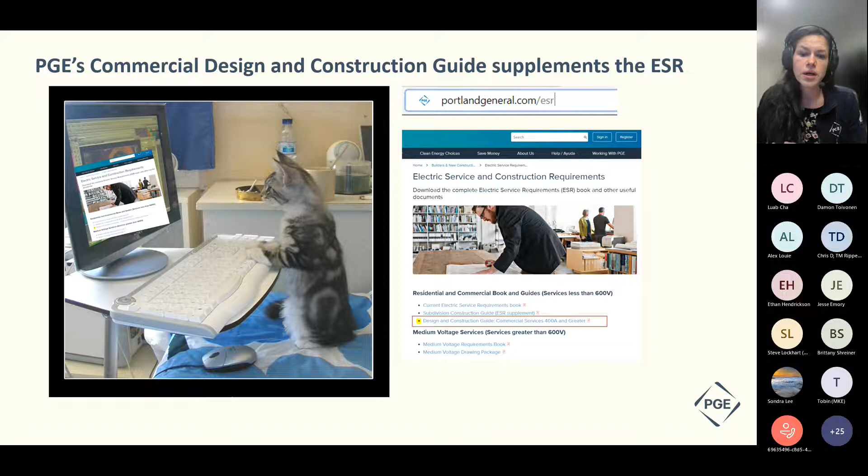All of PGE's public documents are at portlandgeneral.com/ESR. Please take a moment to download a copy of this commercial guide. It's the third item down, so you can follow along with us today. I'll try to point out the page I'm looking at, so if you want to scroll to it, you can do so. Some of you might prefer a physical copy. We do pass out physical copies of the ESR and the subdivision construction guide. We are not yet doing so for the commercial guide, but we do plan to do so in Q2 of 2023.

This is the scope of our commercial guide. It's for customers 400 amps and greater, so this excludes residential shops and barns. But it includes a wide variety of commercial customers, small commercial customers, medium size, large industrial, and everything in between. We're aiming to support new, rewired, relocated, or temporary services, and the designs to support secondary services. So this is not for medium voltage customers.

It doesn't have sufficient information to adequately support certain civil infrastructure projects like bridge crossings or railroad crossings, though it could be helpful for those. You'd still need additional information from PGE. And it doesn't provide adequate information for municipal projects like street widening. The main goal is to provide answers for frequent questions that we get in the field and address certain issues that we've seen. So our focus here is design and construction information from the customer installed equipment to the service.

Key parts of PGE's internal standards are made public. So that's a key piece. We have orally transmitted this information, but we're now trying to proactively provide it earlier in the process to increase awareness. And I think this goes without saying, but this is not a PGE approved job sketch. There will be site conditions that may warrant other items or other requirements that you might discuss with a design project manager and a field construction coordinator. So always go with whatever your approved job sketch is.

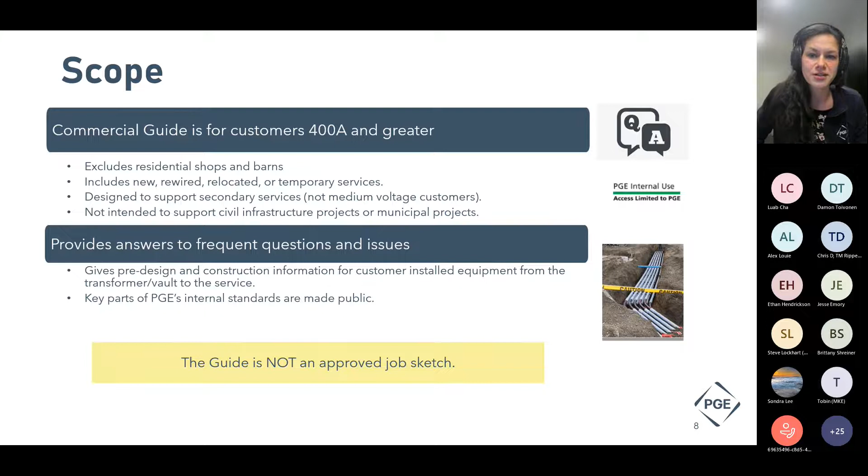The first three sections here are the preliminary information, the pre-design, and the design. And these are largely targeted for architects, engineers, developers, construction contractors, and consultants.

Out of curiosity, could all the architects use that little reaction emoji and raise their hands so we kind of have an idea how many architects we have in the room today? Welcome. Could all of the engineers raise their hands so I have an awareness of how many civil, electrical engineers, and others that we have? Welcome. Oh, today we've got a lot of engineers. This is our second presentation this week, and the earlier one was on Tuesday. They're identical presentations, and you can lower your hands. And all the developers and construction contractors, could they raise their hands here? Quite a few. Welcome to you.

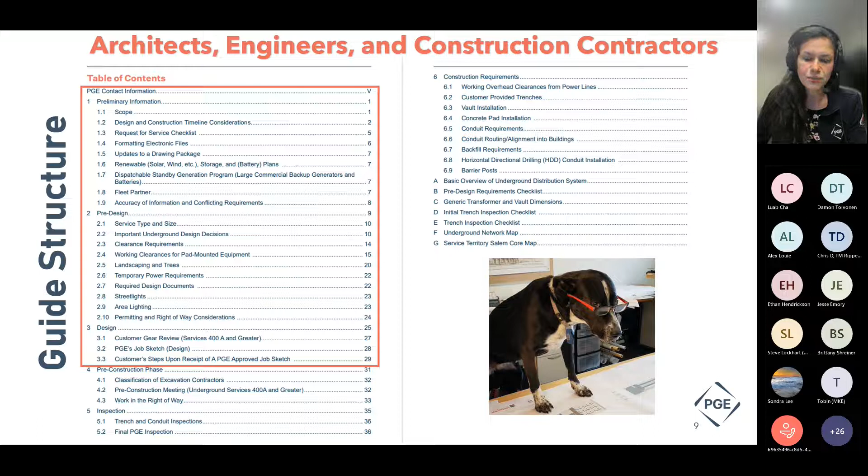So today, you can expect to leave with a better understanding of the steps required from the pre-design stage to the energization of the service. One of the most important steps in that pre-design phase is reviewing clearances. I understand they're not sexy, but PGE does a lot of redesigns that require architects to redesign their landscaping, parking, or even sometimes the main floor of their building. And unfortunately, this isn't uncommon, and it's more common than really anyone would like.

One example that comes to mind is that recently PGE energized this upper left transformer. And later, upon returning, we discovered that the customer installed an ADA ramp right in front of it. So we were unable to open the transformer and no longer had our safe work clearances. The middle top image shows some of the final building clearances. If PGE determines that there isn't room on the customer's property with space for safe working clearances, PGE will require a Class A room within the building, like the one on the top right.

Obviously, adding a room to fit 1 to 3 5 by 9 foot transformers with required working clearances is not an insignificant redesign of the main floor of a building. So our goal here today is to build a partnership with earlier communication with architects, engineers, and developers so we can save time and money and improve our customer experience.

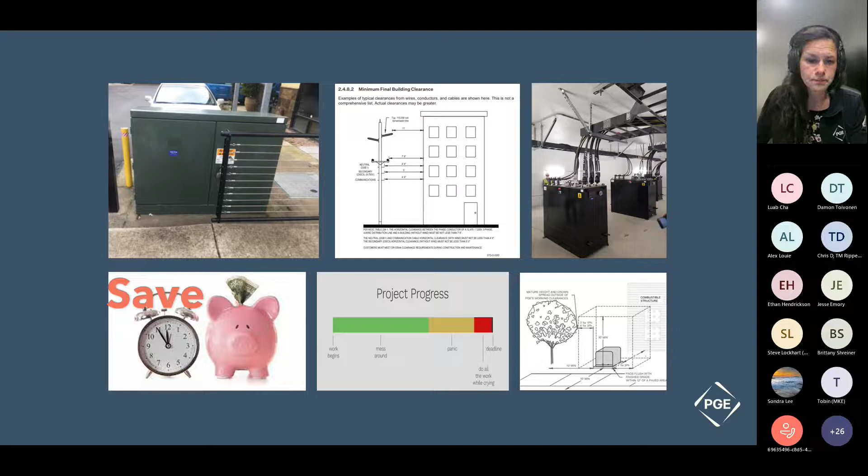For the construction contractors, civil engineers, and excavators on the call, and I know we asked about construction contractors earlier, but could you raise your hand again if you're a construction contractor? Oh, thank you for joining us today. And any civil engineers on the call? I'm here. Thank you for joining. Any, out of curiosity, any excavators? Thank you for joining us here.

In this section, the pre-construction inspection and construction requirements, we have a lot of pictures, drawings, and text showing PGE's installation requirements for pads, vaults, and conduit. For example, in section 6.5.3, we provide text and drawings for conduit installations for pad-mounted transformers. Before, this information was on our job sketch and transmitted orally, but there's only one PGE job sketch, so the information was not always readily accessible to contractors and subcontractors. So this guide can easily be downloaded for a larger audience.

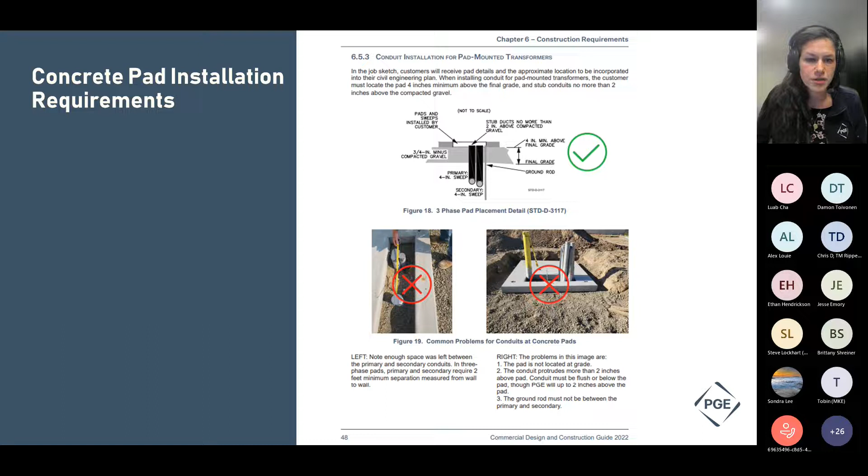We've also provided some examples of things we've seen in the last year that are walk-offs for us, or common problems that need to be resolved before we can move forward. Spacing within the opening of the concrete pad, the height, etc. We'll get into those more in the later half of the presentation. And lastly, I'd like to highlight the sections that are most likely to assist our electricians.

How many electricians do we have on the call today? Welcome. Seems like we have at least one. We had several more, quite a few on Tuesday.

This guide isn't as focused on electricians as the ESR. So you're going to see that the information you're most likely to use is in various sections. The first, at the start, with the design and construction considerations and timing that can be helpful for all those here on this call. We've added quite a few pieces of information on the timeline. Second up, the customer gear review process. Many of you are already familiar with it, but we do have a checklist now of the items we're going to request from you in section 3.

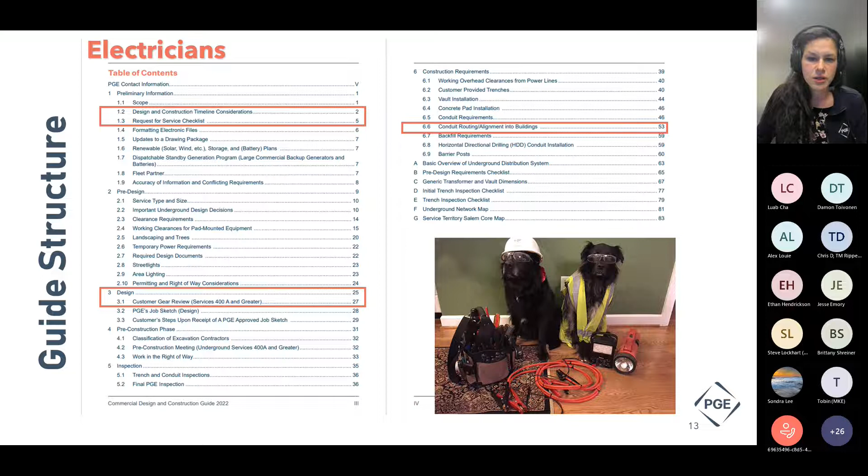And lastly, in section 6, we have additional information here on the conduit installed in switchboards. We provide some dimensions, what that minimum opening in the termination pull section will be with typical PGE conduit configurations. So we'll get into that a little bit later.

Before jumping into the 6 sections, I just want to point out here that if you've ever wondered what each PGE team does, this chart on page 5 and 6 should help you out. It provides the PGE teams assisting with the request for service phase, and then those PGE teams assisting with the application review and construction phases.

If, for example, you've recently been contacted by a construction project manager, a CPM, this is a new position for PGE, and they facilitate project coordination after the PGE approved job sketch has been issued. So you can see that here.

So we're going to jump into section 1, preliminary information, on page 1 if you're scrolling on your digital copy of the commercial guide. This section is dedicated to process information. It has a lot of key details that are not available on PGE's website, and we're going to go over the request for service checklist and the design and construction timeline.

Before doing so, though, I'd like to point out section 1 has information on how to get information on renewables, on our fleet partner program, that's PGE's EV program, and the dispatchable standby generation, which is a program for larger batteries and diesel generators that is very popular.

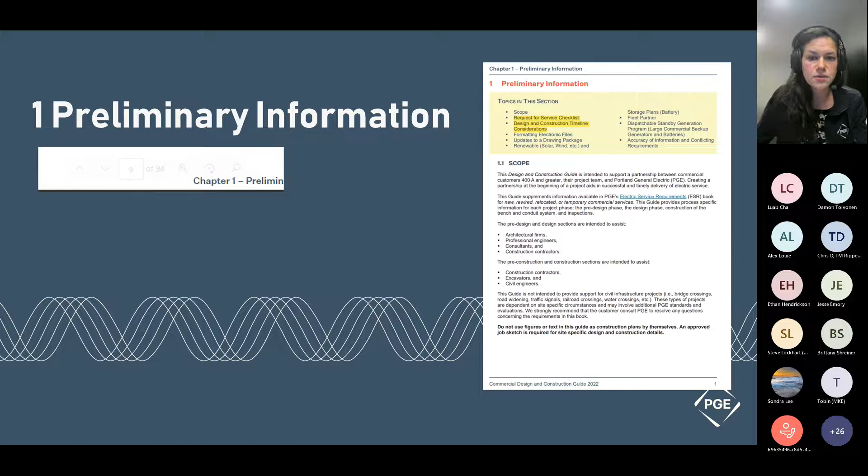This is a high-level timeline you'll find in each section of today's commercial guide. The stages of a project listed here are sequential. So you do need to complete the design phase before you can enter the construction and inspection phase. The pre-design phase is often the longest and depends on receipt of required design documents. We very rarely receive all necessary project documents with an initial request for service.

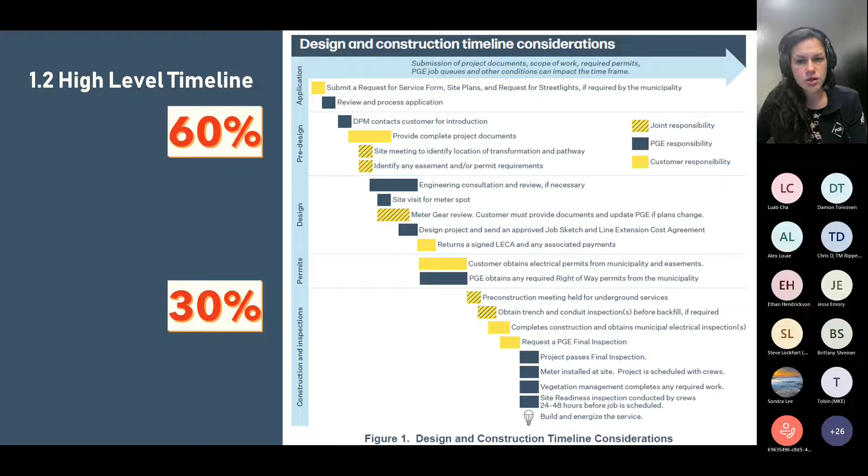And ideally, customer documents are missing because the customer's project team contacted PGE early in the project to obtain those preliminary site-specific requirements, because that early communication is really helpful in avoiding costly redesigns and change order requests. But at the end of the day, PGE's job sketch relies on the final plans, those 90% plans.

And because changes to grade or changes to landscaping, trees or bioswales or awnings and porches can significantly impact our clearances, and may lead PGE to change the equipment that we've selected, its location at the site. So keep us as part of your partnership in giving us those updates. You can see on page 7, section 1.5, how to provide us updates to a drawing package.

So the other thing to mention here is that some permits take quite a bit longer to obtain from the entity providing them. And for example, this commercial guide is not intended to support railroad crossings, but it's a classic example that obtaining those permits and river crossings as well can take 12 months or more. So just be aware that that's an additional time frame here.

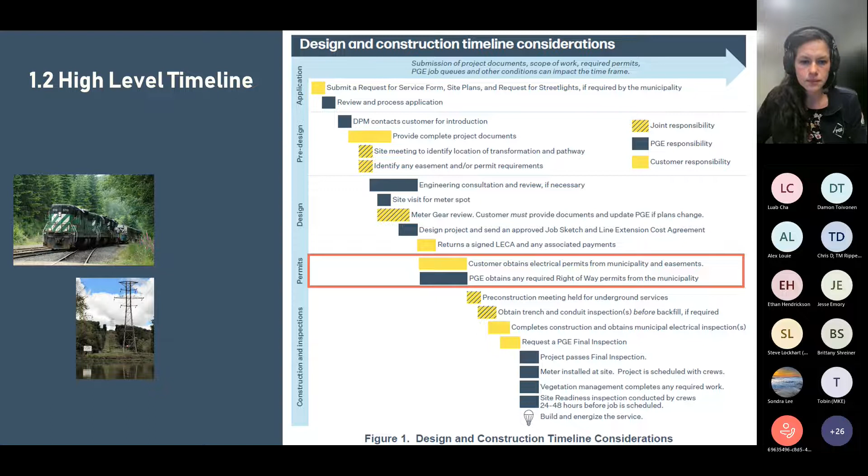Moving to section 1.2.1 on page 3, you'll see this process in greater detail, how to request service. We're moving towards a digital platform, Power Partner. So as you request that service, you will be asked questions. And to continue through that Power Partner process, you need to have information up front about the load, whether you plan to have EVs, street lights, etc.

We are aware that sometimes people do not know that information. Just be aware, though, that later somebody needs to call from the project team and say, we do need streetlights. The municipality has required that, so that we can create an additional job for you for that piece. And it is very helpful if they're requested early, because they go into the same trench and conduit system, and will hold up that inspection by the municipality, which is required before PGE completes its final inspection. So note that.

I'm going to move to the next page here. Page 4 of the commercial guide, if you're scrolling along on your own. And here I'd like to point out the job is on hold for obtaining permits and any special ordered equipment until PGE receives the line extension cost agreement and any required payments. So please, if you do receive a line extension cost agreement, sign it, provide payments as soon as possible.

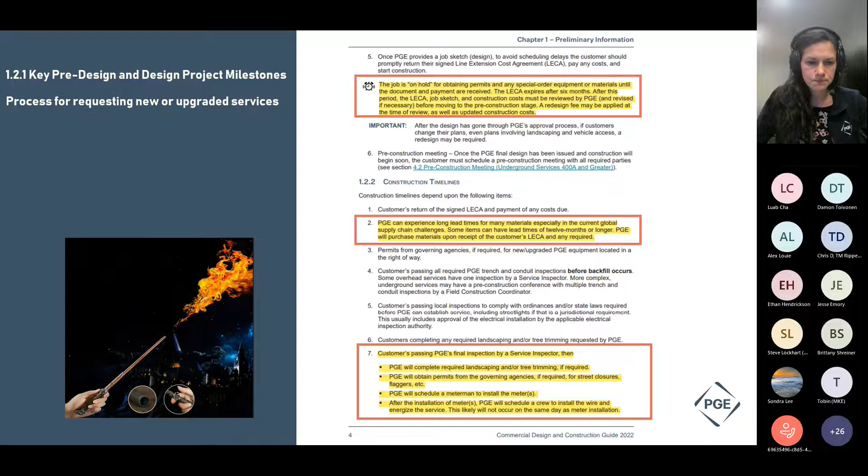So on page 5, request for service checklist, a lot of it is information you may have seen before. It is quite a bit more detailed than our website because we're trying to provide you upfront all the different items we typically would like you to have when you apply. One of the items, though, that often gets missed is temporary power.

If a site is increasing the load, they have an elevator and it's for construction and it's being developed, especially for high rises, and the load changes, please give us a call, provide us an updated load sheet so we can assess whether the transformer at the site can adequately support your construction. Unfortunately, it's not uncommon to forget this step and blow a transformer, which leads the project to come to an abrupt halt.

Also, please note here that we do need those streetlight designs. I've made mention of that, but especially those frontage improvement plans. The sooner we get them, the better. We almost can't design our projects until we're aware of what that frontage improvement plan looks like, because that's often where we're looking to locate our equipment.

And there is a more detailed list in section 2.7, required design documents. And that is just an awareness that as we get closer to that 90% of your project plans, there are quite a few different things that we will need from you, elevations, grade, etc. So that list is quite comprehensive and we are confident that the majority of projects often need quite a few of those documents.

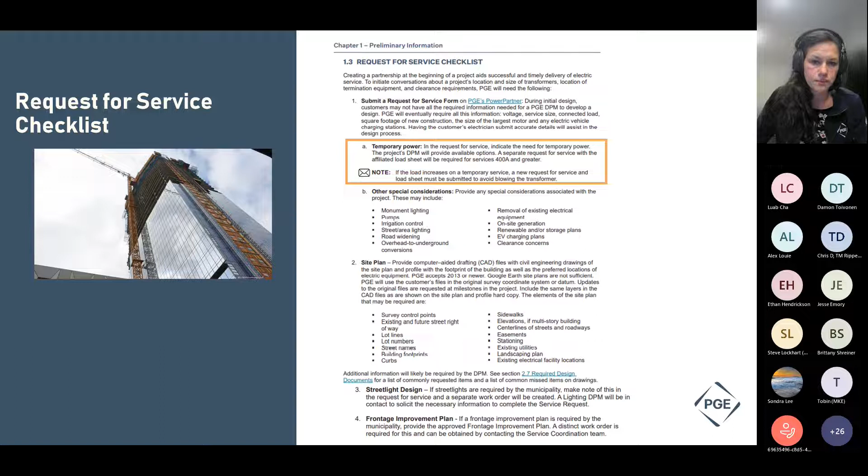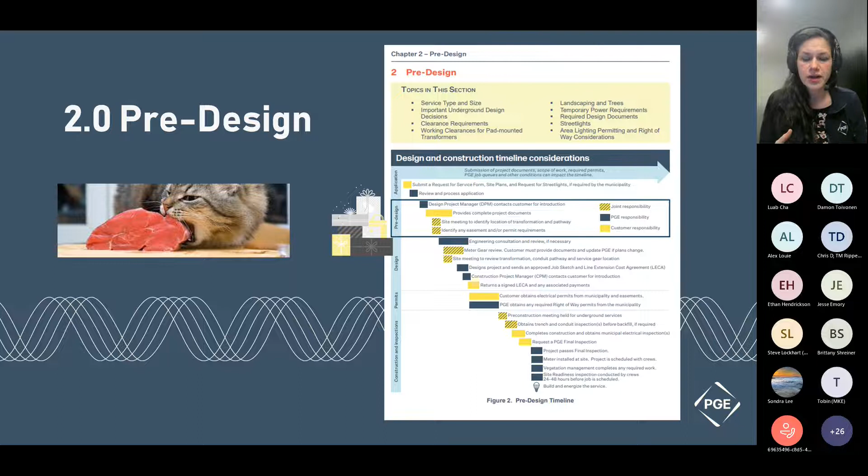So let's get into the meat and potatoes for you. Section 2 is the first meat and potatoes of this document. Section 6 is the second one. The pre-design is really about the architects, engineers, contractors in the early phases of the project. And Section 6 is about the construction. But this is PGE's gift to you. We're really trying to be upfront and available by giving you these conversations we've had in the field for decades proactively.

On page 10 of the book, section 2.2, important underground design decisions, lists the key PGE decisions for each service. Each bullet has its own subsection. So service type and location, size and location of PGE transformers and/or switches, pads, vaults, and conduit pathway, meter gear location and type, clearances required by PGE, and other requirements.

So each subsection will kind of help you understand what's not possible, what is possible, and what might be possible, but should definitely be discussed with PGE. At the end of the day, PGE will own many of these decisions, like what equipment we select for the project. But we're trying to share them with you because we understand that often we're contacted later in the design process, and it would be helpful to have a little bit more information sooner.

And we are aware that architectural schools and engineering schools do not provide this information. So we want to fill in that gap with information that can really make us partners together. And also just an awareness that we come to these projects with different focuses, that you're looking at the timing, the cost, the customer demands, and those are really important. And we really want to support our communities and the building projects in them.

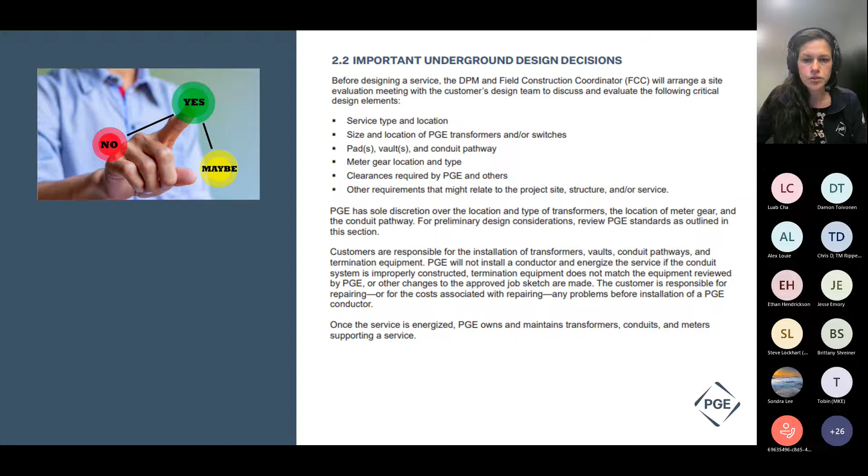And we are focused on safety, reliability, and maintainability of the service over 50 plus years with different building owners and renters. And so we want to meet each other together. So it's a cost-effective project. It can be on time, but it can also be safe and maintainable for 50 plus years with different building users. So let's take a look at section 2.2, location of PGE transformers and switches, to kind of get into the meat and potatoes.

PGE needs space on customers' property for transformers and safe work clearances. And generally, when PGE arrives to site, we need to find space, and the spaces are often impacted by parking or trees or other municipal requirements. This is definitely part of that pre-design process. And it's pretty common in all our regions: Salem, Beaverton, Hillsboro, Portland, Gresham, and honestly, it's getting harder with zero lot lines.

So you might be thinking, okay, this is good to know, but what other options do I have? Essentially, we'll get to those in a minute. But we do need the equipment within 15 feet of a drivable surface. And this is because our equipment's rather large and heavy. I'm going to show you a picture here.

Our trucks are not the size of typical trucks. They're much taller, they're wider, and they're heavier. They break sidewalks, they damage landscaping, and they don't fit in most multi-level parking lots. So this is why we need our equipment within 15 feet of a drivable surface. Also because if an outage occurs in the evening or early morning, squirrels are very active early in the morning, we need to be able to access it quickly to restore power.

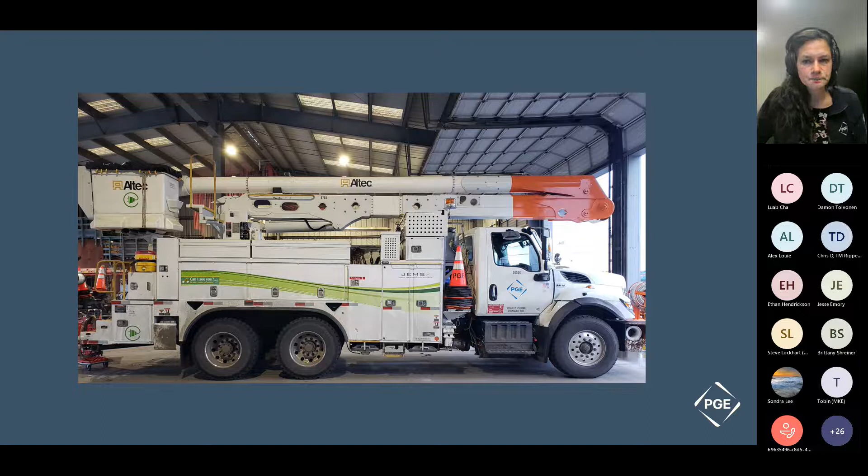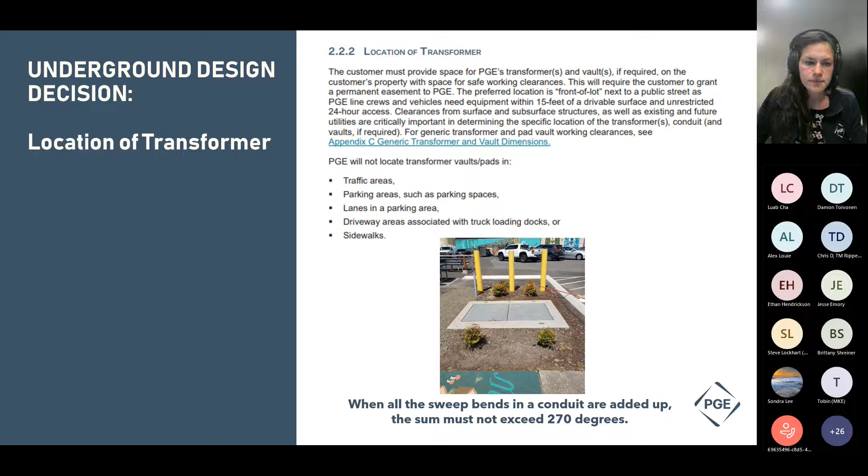If you're wondering how big our pads and vaults are and their required clearances, you can take a look at Appendix C. We've compiled some of our most common commercial pads and vaults. You will not get to select your pads and vaults for your job. It will be on your approved job sketch. But we're trying here to provide information about the space they generally occupy, so you can ballpark it.

On the top, you'll see that looks identical to the job details that we provide customers. On the bottom left, these are kind of new and novel, trying to show you what those clearances are for that pad, on the sides and back and in front of them. And then on the right, the construction notes. And at the very bottom, the contractor level required to install this pad. And we'll go over contractor levels later in section 5 of this presentation.

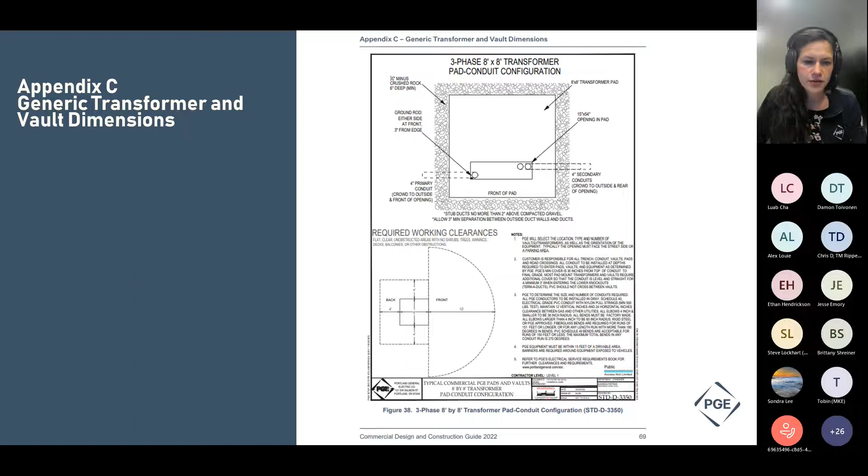So if we can't collaboratively find a location on the private property, and PGE's like, yes, we agree, it's not an option here. Though that is our strong preference. We want it on the outside so it's readily accessible. PGE will require a Class A vault located at grade. And there are a lot more requirements for Class A vaults.

So if one of your projects does go that route, you will need to request the standard from the design project manager with whom you're discussing the site. It's LD 31007. And if you save a copy, be aware that it can be updated. So always request the latest, most current copy of that standard. But in general, how big does the room have to be is always the question. And it's kind of decided by these criteria.

The crew installation requirements, so how close it is to drivable surface, what that entry looks like, what the safety hazards are by the entryway, is it flat, etc. The proximity to the electrical room, the closer it is to electrical room, the easier. And the number of transformers. So are we dealing with one transformer or 3 transformers? And each of those has its own required working clearances.

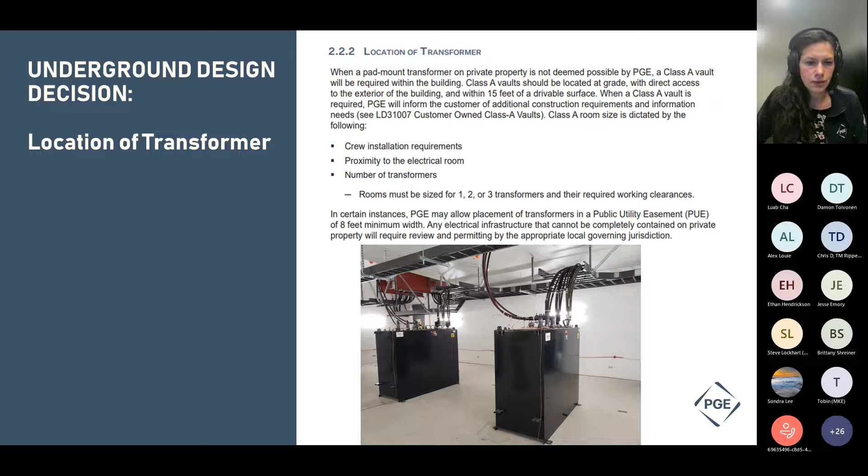So we have information here about vault grade, location, and clearances for vaults. The one notable thing I wanted to mention here on unsuitable locations for vaults are bioswales or other similar structures. Well, we very much support bioswales. They're very good for the environment and they're good for all of our communities. Water and electricity don't mix. And so we do not locate a transformer behind a bioswale for the most part. Anything you want to add to that, Jake?

I think it was mentioned before, someone asked about whether the conduits could go under bioswales or in bioswales. At this time, PGE does not prefer it, and most municipalities won't allow it. So it's not so much PGE says absolutely not. We prefer it doesn't go in there, but most of the municipalities don't want anything under or through their bioswales because it kind of defeats what that bioswale is trying to do.

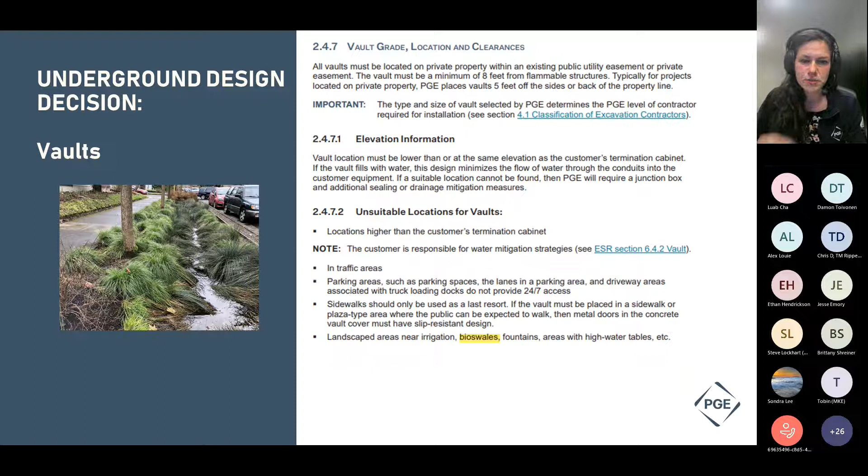And if I understand you right, also, if we have something that breaks and we have to trench that pathway, we're going to trench through the bioswale. So I can kind of see why that wouldn't be ideal. Just wanted to give folks a heads up with that because they're becoming more common throughout the territory.

So some folks might be wondering, okay, you had some information about pads. Here's some information about vaults and their required clearances. They're also in Appendix C. You can see how deep our vaults are to understand how deep the trenches are likely to need to be, and the space they occupy. Just a heads up that our 8 and 10 series vaults are not in here. They're our biggest vaults, just because they're often designed for the site and its clearances. So these are our most common commercial pads and vaults, though our 8 and 10 series are pretty common. They're not in here.

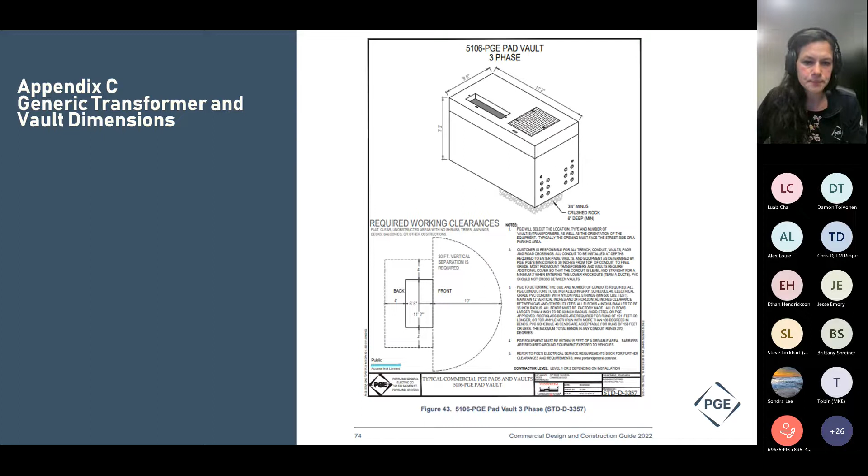So we're going to transition to clearance requirements. And some of the architects may not feel this is part of their job, but the decisions that the architects make and the engineers here on the call make about the roof and the windows, the balconies, the parking, the landscaping, the materials selected for the exterior of the building, all really impact PGE's clearances. And one of the biggest reasons for our construction delays and additional customer costs are clearances that aren't considered in the early phase of a project before the customer contacts PGE.

And these are key categories of vertical clearances and horizontal clearance requirements that we have to abide by. Just a heads up, we have the meter clearances, which lots of folks will remember. NEC and EUSERC clearances. We're EUSERC companies, so we follow those. For the electricians in the call, if you haven't downloaded a 2022 edition of the ESR, I highly recommend that you do it. Pull up section 3.9. We added table 4. It's very useful. It makes it easier to identify what section of the ESR you need to use based on the service type and gear rating, and the EUSERC requirements that are affiliated with that. So take a look at that.

The fire safety clearances, generally a lot of people are aware of those, and they are in our ESR as well. The NESC clearances are the clearances that we as a utility need to abide by. And these are usually baked into our requirements and often have an adder that we've added on to ensure we're compliant.

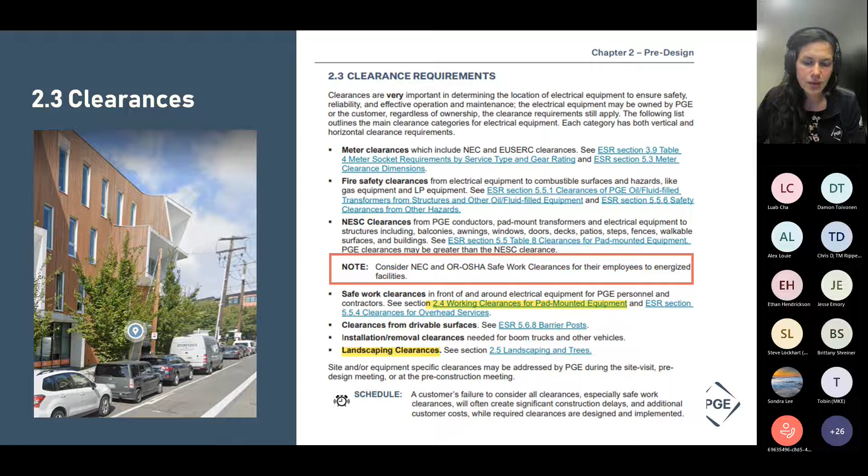Our clearances from drivable surfaces, installation removal clearances that can be greater than those safe work clearances due to the size of the equipment needed to install a vault, and the landscaping clearances. So we're going to get into both the safe work clearances and landscaping clearances here today. We unfortunately don't have time to get into all the other ones, but here's some hyperlinks to kind of research those further if you wish.

So these are pad-mounted transformer clearances. We do need 30 feet above pads. That includes awnings or balconies, really anything above the pad for fire safety. And 3 feet for single phase, 4 feet for 3-phase pads from the pad to any mature crown of a tree. And I say mature crown because often folks will put the trees like within 6 inches of those required clearances, which then means that the tree impinges on the safe work clearances.

Later, 10 years, 20 years later, you'll see kind of oddly cut trees near power lines or electrical equipment, and that's not ideal for anyone. We love trees, and I assume you do as well. So if possible, please kind of keep that awareness of what that mature crown will look like in 10, 20 years. And lastly, we do need 10 feet in front of the opening area of the electrical equipment. You'll notice that the opening here is towards the sidewalk. That's often the way we design them. They're not always.

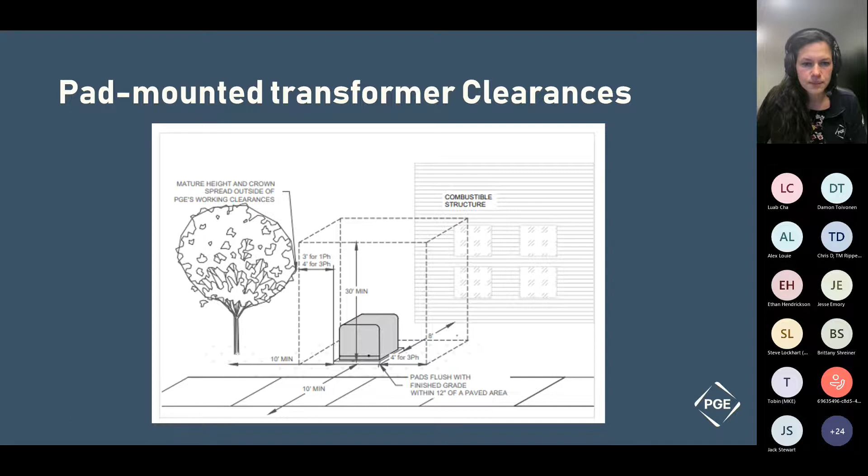If you want to relocate overhead wires in a temporary fashion, you'll need to ask for a work order to do so. Often we're able to do that, but just be aware that that does add time, evaluation, design, and construction costs and time to the project. And in some instances may not be feasible. Like it is feasible if it's a 2-3 year gap with $1 million budget, but that's not realistic, right? So there are times it's not possible to relocate wires in an area, maybe because of municipal restrictions, maybe because of proximity to a substation and the number of other customers impacted, just FYI.

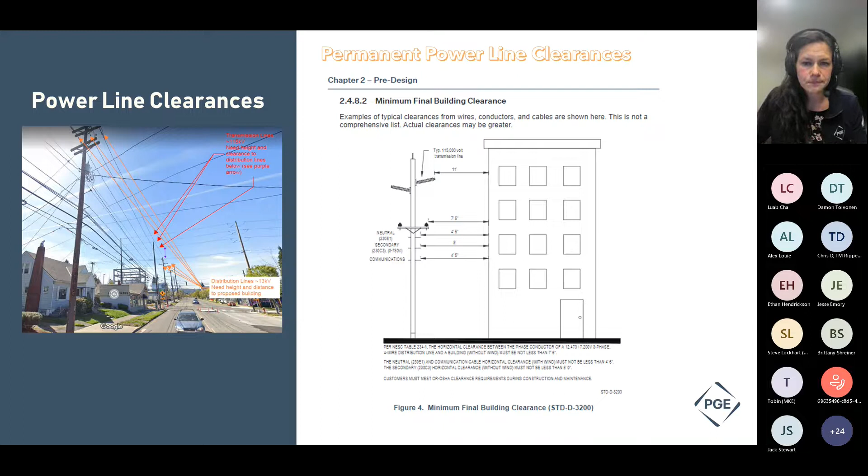Here's an example of a site, unfortunately, that didn't do so. They got their architectural engineering plans submitted, approved by the city, and then came to us, and we were like, those are transmission lines and distribution lines, and their proposal was extremely close. It didn't take into consideration these minimum final building clearances. And also, it was very, very close to a substation within half a block. And so, unfortunately, we said we really couldn't achieve our code requirements for safety of the building and the people within it. And so they had to go back to the drawing board. It's not ideal.

Landscaping clearances. Okay, so I realize that landscaping is usually the last thing that goes in, but it's often considered in the very, very early stages. So here are a couple pictures for you. Top of the pad, on the bottom of vaults relative to the sidewalk. The bottom left is the vault is within 12 inches of the sidewalk, and so it's flush with final grade. On the bottom right, you'll notice that it's not within 12 inches of sidewalk, and so it's 2 inches above final grade for that vault. And those are slightly greater clearances of 5 feet on the sides and behind the vault.

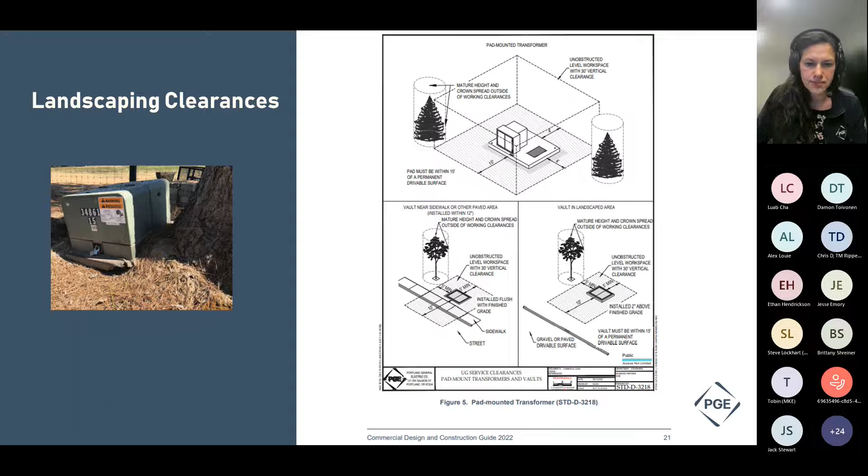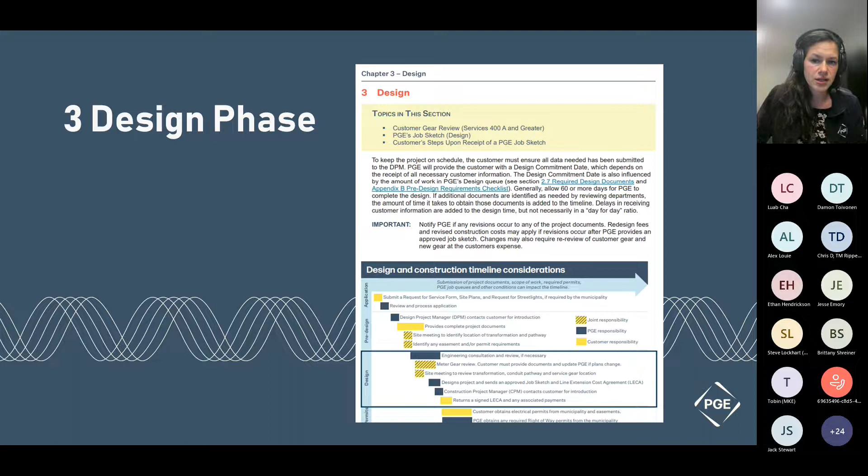Okay, well, that is section 2, and we're going to transition to the design phase, which is often a shorter phase. It varies amount of time, but in general, 30 to 60 days is not uncommon, though sometimes more. But you'll see here that it's really important just to notify us if any changes do occur on your project plans. We're aware that they happen. Please tell us the sooner the better, so we can evaluate and make sure that our project is making consideration for those changes.

Here's the list of customer gear review. The first set of bullets are ones that electricians on the call are often extremely familiar with. We've been using them for a very long time in a table that we send back and forth between the electricians and our meter gear engineers. And if you do want a checklist, you now have one in addition to that table. And as well as an awareness that now the meter gear engineers are not sending final review, it's the design project managers. That started in 2021.

And the goal was to increase awareness of that conduit pathway, the number of conduit, the conduit routing. So the design project managers provide that final table. Though the meter gear engineers talk with the electrician, ultimately, that table could change and additional pieces of it are made available when the design project manager sends it out.

If you're looking at a site that's getting redesigned, please take note that we will often require a meterman to go to the site and look at clearances. If the load is increasing, then we will require that they follow our current standards. So if it was designed 50 years ago, the standards may have changed and increased clearances may be required. So just take note that we will want somebody to go to the site to actually take a look at it and make sure we can achieve those clearances.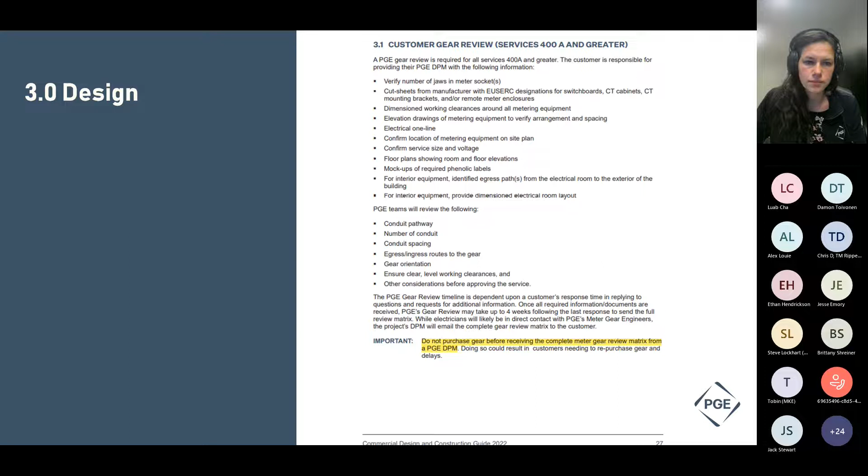Anything you want to add to that, Jake? I think it's covered really well. Okay.

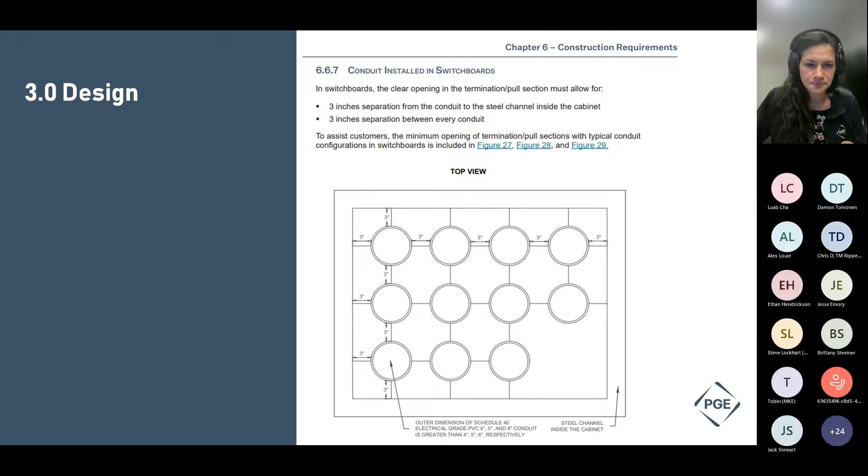Electricians, I know I already showed it, but I just want to highlight this because it's the key piece for you: conduit installed in switchboards. We do require 3 inches from the conduit to the steel channel inside the cabinet, as well as 3 inches separation between every conduit. And we've provided a couple additional figures of that. I've zoomed into one of those here on page 55, and it's the minimum opening of the termination pull section with the typical conduit configuration.

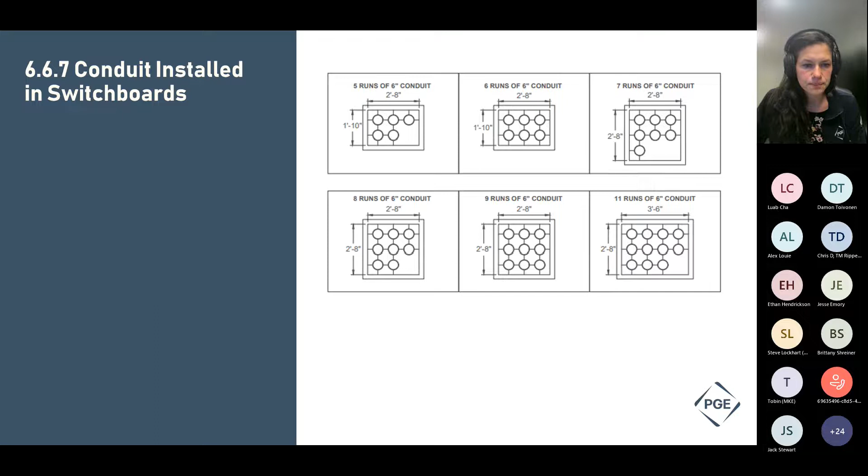Anything you want to add to that, Richard? Just make sure that you guys use chairs whenever necessary, so we can make sure that you get good backfill between all of your conduits. Yeah, that's about it. Perfect.

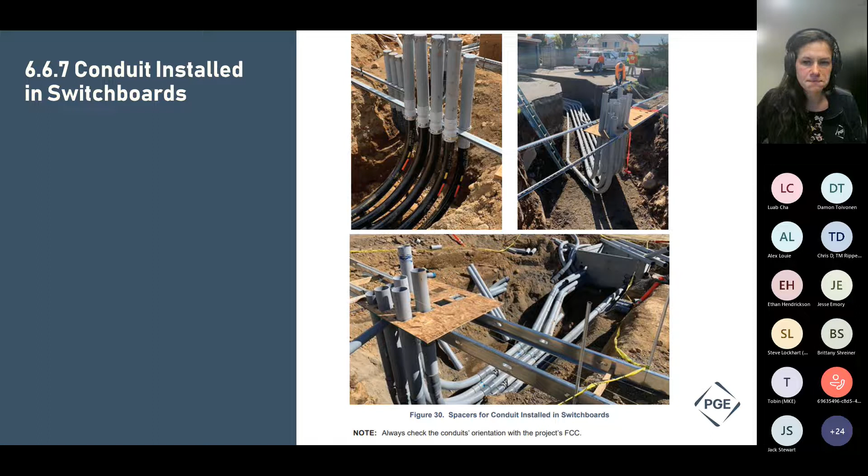Okay, so last up is we've provided an approved job sketch. Now what do you do, right? Here's kind of a list of items that we expect are most likely. There could be additional ones on your list, but here are the ones that we think are likely. And the most common one that we've seen missed is that our approved job sketch does not contain site surveyed information. So the customers need to then take it and integrate it into their civil plan with any surveying that is necessary. And this is page 29.

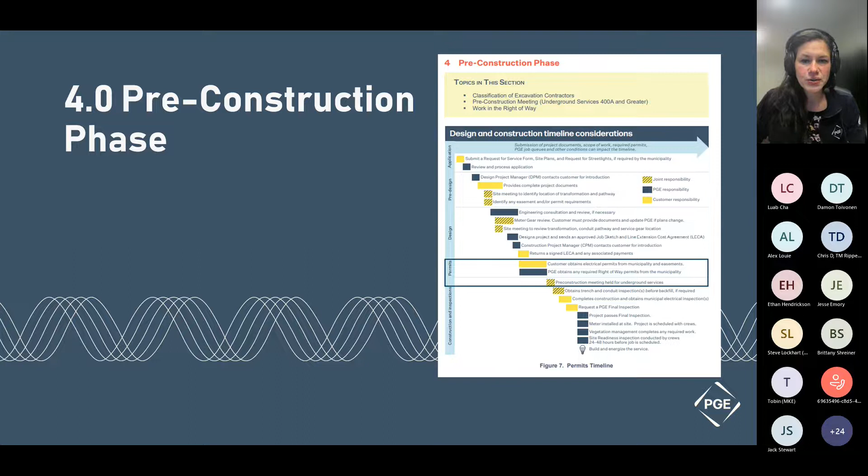So with that, we have concluded sections 1 through 3. And we're going to be transitioning to the meat and potatoes for our construction contractors, our civil engineers, and our excavators on the call. And the first piece of that puzzle is that once an approved job sketch is issued and construction is set to begin, please schedule a pre-construction meeting, or a pre-con. Bring the whole pack, or if you prefer cats, bring the whole clowder.

Civil contractors, general contractors, project managers, foremen for the excavation are encouraged to attend. PGE and the team will walk through the job site there as well as the approved job sketch and align together, make sure there's no issues, that no changes have occurred in the project, that the elevation and grade are still the same, and really walk through from the transformer to the gear, what it will look like and what the stages are of that process.

One of the pieces of the puzzle is that we will be asking for information about your excavation contractors, as we do require certain levels of excavation contractors. Jake, would you like to go into the details of this slide?

Yeah, I'm just trying to get my camera on here. Good afternoon, everyone, or very late morning.

I'm Jake Lang, manager of the line design department at the Portland Service Center here in Southeast Portland. I manage the contractor level qualifications for all the civil contractors that do excavation for projects all over the service territory. For those that don't know, there are 3 qualification levels. All 3 require that they be PGE approved. And what that means is they've signed a service agreement with PGE that has language in it about how they'll perform their work safely, reliably.

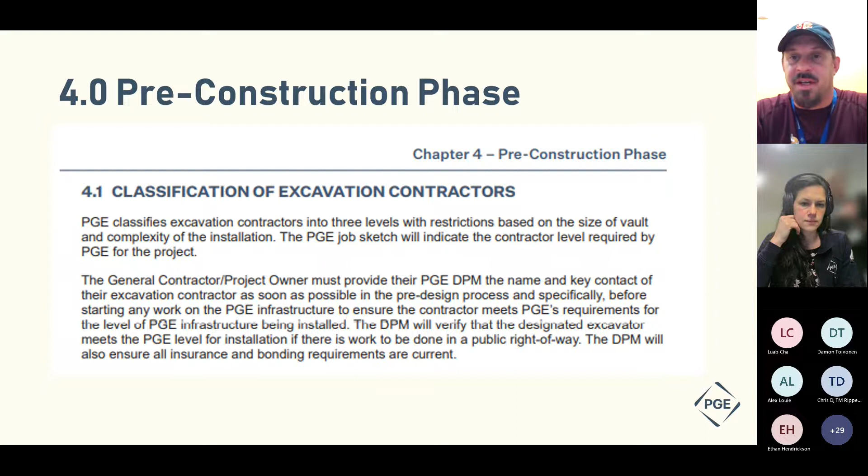Thank you, Jake, for going into that. Really appreciate it. Move on to the inspections. This phase is probably pretty long for the commercial customers, but relatively self-explanatory in that generally there's multiple inspections for the trench and conduit work, and there's one final inspection for the trench and conduit work by a field construction coordinator.

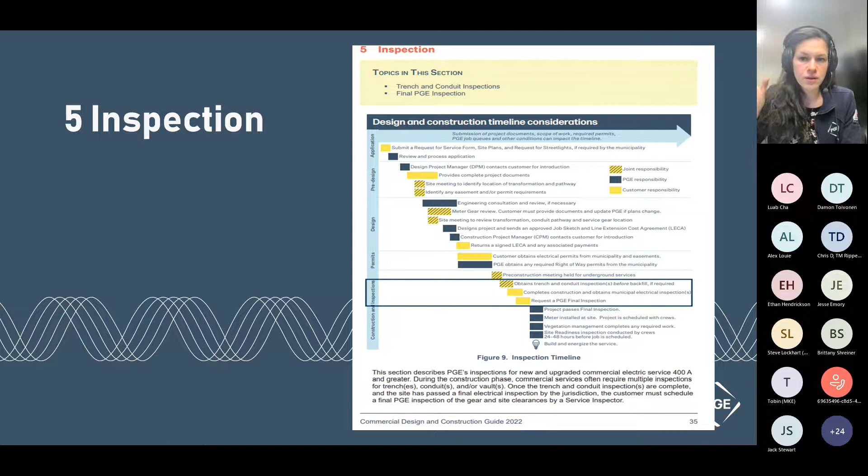After that final inspection, note that there'll be another final inspection by a service inspector. So that final inspection by the field construction coordinator is for the trench and conduit pathway. Then you get the final inspection from the municipality, any additional things, and PGE comes back one last time to do a final inspection of the clearances, of the labeling that might have been required, of the landscaping, etc. So that's probably the only thing that comes up on a fairly regular basis as a point of confusion.

To schedule that final inspection, generally the earlier ones for the trench and conduit pathway, you'll be calling your field construction coordinator, like, hey, can you come to site? I have a question. I think I'm ready for my inspection. For the final PGE inspection, you need to call service coordination.

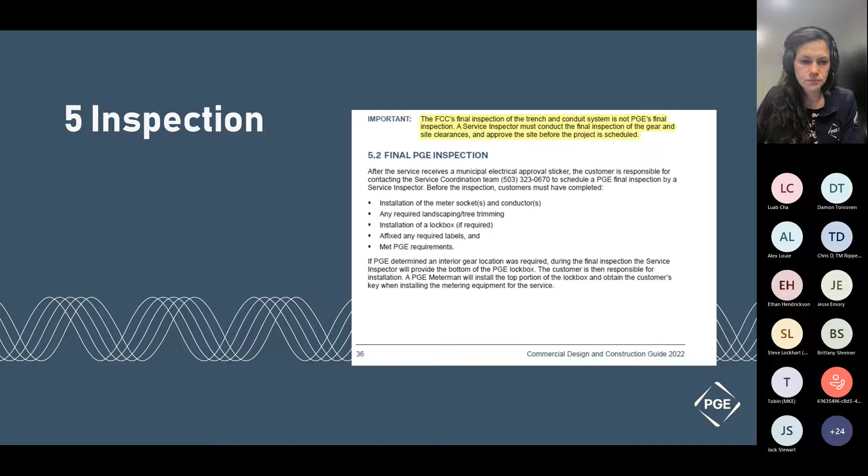Same line as you call for when you want to add street lights or increase the load on a temporary service or create a new job. And these are the checklists we have to consider before calling your field construction coordinator. First, for the initial trench inspection checklist, and then later the trench inspection checklist once the trench has been backfilled. Do you have anything you want to add about these inspection checklists, Richard?

No, they're all pretty self-explanatory. It's really beneficial to all parties that they look this over. Every region is a little different as far as calling in for inspection. Some could get there possibly the same day. Others might not be able to get there for 2 days. So just be prepared for that, plan accordingly for that.

Especially with rainy weather. I know that your trenches fill up, trying your best to get it. During the wintertime, we've got a lot of contractors all calling at the same time. So it's advantageous to just try to plan ahead. But yeah, follow this list and you should be doing well. Thanks. I'd like to add a little bit to that.

So this is the list of, for the most part, the minimum requirements. Project specific, there may be an instance where we need to have more than this states. So these are the minimums; depending on very specific environmental or site-specific projects, these could be increased, but we'll attempt to identify that and be very clear when that occurs. But just want everyone to keep in mind, these are the minimum requirements.

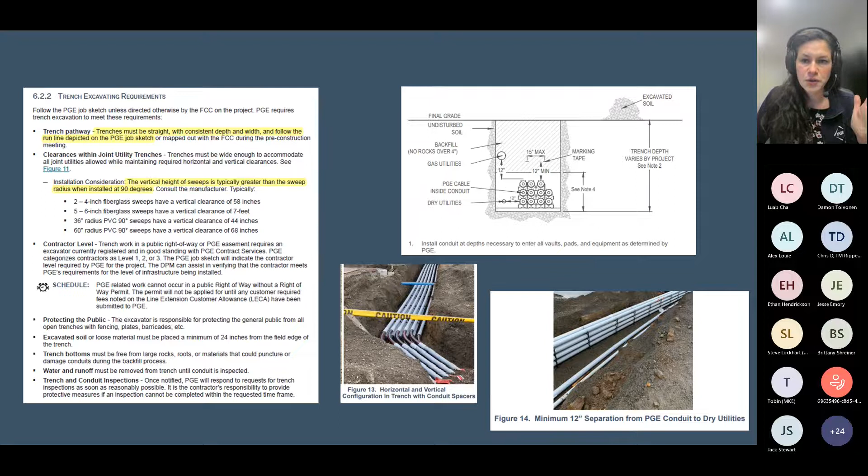We have a list of approved vaults, not yet published, but hope to do so soon, ideally no later than February. And it would be on portlandgeneral.com as well. So we are looking into it, and do have expectation that we will have an additional vault manufacturer available to our customers soon.

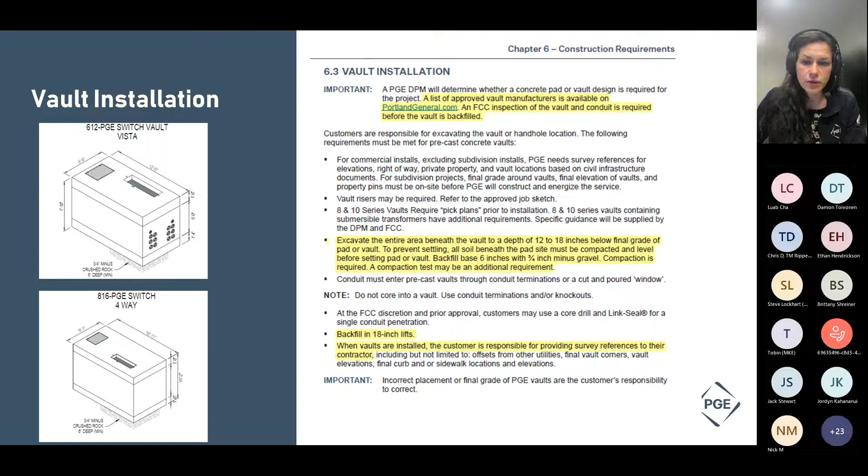We do have a new requirement here I want to highlight for those on the call, that our civil engineer has requested that we meet industry standards. So please backfill in 18-inch lifts for these vaults. And here's some pictures of the vaults. Appendix C has what those typical dimensions are for them.

As well as how that vault installed can look visually with the lifts, depending on what materials are used for the backfill. And here are pictures again of those vaults, either flush with finished grade or 2 inches above finished grade. So we understand, text is really important, but often a picture is worth 1,000 words. But please try to read the text. It really helps us and helps you so that we have a successful project.

Next up, conduit installed at vaults. So we first have how to install the pads, how to install the vaults, and then, okay, you install the vault or a pad. Now, how are you going to install the conduit? And so again, we have text describing that process here, but to recap, conduit must exit vaults with 3 feet of straight distance before adding a bend. And this is helpful maybe for the architects or developer engineers on the call to realize those distances will be required in the construction phase downstream.

So yes, the vault and then that 3 feet from the vault. In some instances, when we're dealing with very large services with 5 and 6 inch conduit, PGE may require actually 5 feet of straight distance out of the vault. Just be aware of that.

And then pretty much all PGE vaults require trench depths greater than 30 inches to reach the bottom termaducts and/or to be flush with the top of the transformer pads. So vaults may require 6 feet of depth or more to reach the bottom termaducts.

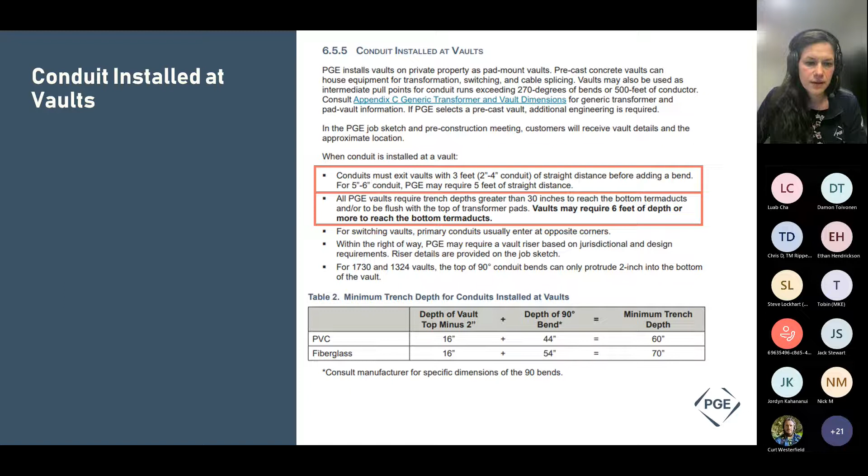Next up are some pictures showing that. Do you want to take over here, Richard, and go back through the requirements with the pictures? Yeah, thank you. So the top drawing up there, we need that 3 foot of straight stick coming out of the transformer vault, no matter what size, up to 6 inch. And then that's where your sweep goes on. Now you're looking at that bottom left-hand picture. You'll see the 45s. Between those 45 fittings, we need a minimum of 5 feet of straight stick for pulling purposes.

Yeah, I think that looks pretty self-explanatory. It's got the chairs there, so make sure that you use your chairs. Also, another thing I wanted to bring up with backfill, I believe it states it in the ESR, sand is no longer allowed to backfill PGE conduits. It's a thermal problem. So you're only allowed to backfill with 3/4 minus or native backfill. So keep that in mind when you're using those chairs.

Preferably when all the conduit is chaired up, we highly recommend that you backfill it with 3/4 minus whenever possible, just to 6 inches above the conduit. Native backfill does not want to go between those chairs and those conduits very well, and you will get a lot of settling.

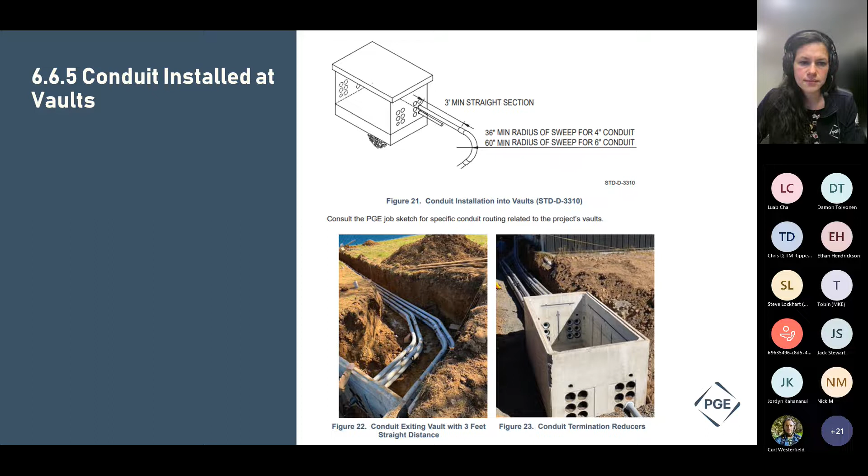And it's also tension on the wire. When it's coming straight in like that, sometimes we have to rig it inside that vault and put another 45 or 90 on it with a roller. So now we've increased the tension on that almost double. That top picture, that's a very nice representation of a large service, 6-inch service.

Call your FCC. We're here to work with you to help you any way we can. We're here to help you successfully get the job complete, not try to hinder you. And the more you keep us in contact, the more we can help you.

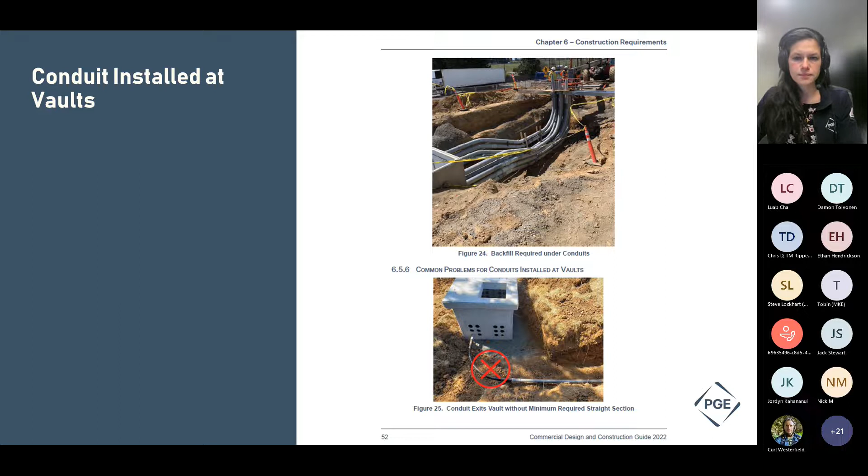Yeah, pulling eyes. You got gear in a basement, underground garage, we're going to need pulling eyes. And these are things that will also be discussed with your DPM and your FCC. So it's really important. I can't stress it enough: early information. Get as much information to us as you can so we can process it and get you all the requirements that you need, instead of you being surprised down the road.

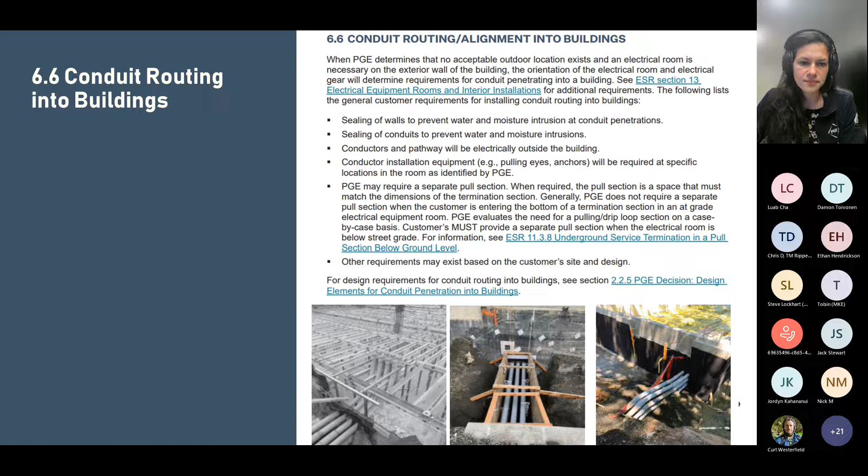So right here, backfill requirements. When we go underneath any footings, foundations, slabs, everything has to be encased in red dyed concrete or red dyed CDF, 5 feet out, 6 inches around.

This here, it looks like they are installing the conduits before they put the footing across. The highest conduit has to be a foot below the footing, and we need red dyed CDF poured a foot out. This is an example right here. If you guys have any questions on this later, feel free to ask.

And just a note about the red dye, we do require plant mixed red dye when the CDF or concrete is used. Sometimes folks will be surprised by that or have forgotten that. But yes, we are looking for the high quality plant mixed red dye.

I'd like to add just a little bit to a lot of the stuff that Richard has covered. Really stressing the importance of the pre-construction meeting. In the guide, it's got the recommended list of stakeholders for each project to be present. But keep in mind that that list is for the installation of PGE's infrastructure. It wouldn't be a bad idea to include others that may be impacted by how this gets installed, where it gets installed.

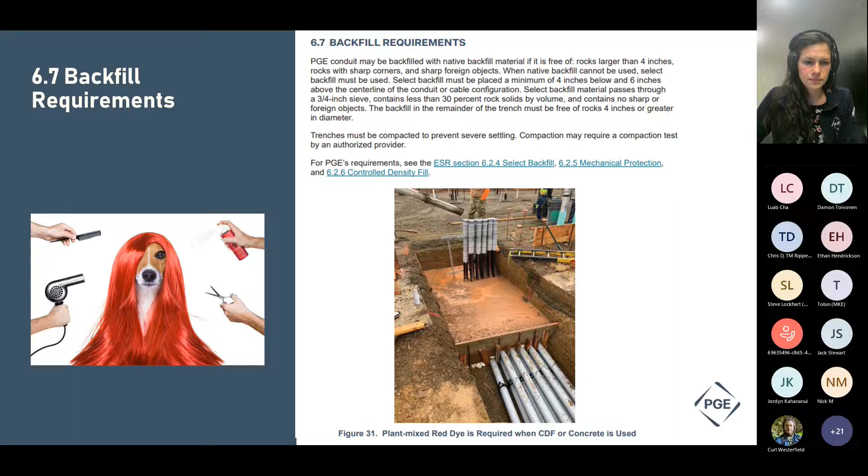If you have someone working on the communication side that's different from the electrical side, any stakeholder for the entire project may need to participate in that pre-construction meeting so that a conflict could be identified there and addressed, rather than when the ground's opened up and suddenly there's an issue because we're coming in slightly different than where we thought, or COM has got a room next to where we're coming in.

So keep in mind that this list of stakeholders is specific to the electrical installation, but there could be others on your site impacted by how it's going in, where it's going in, and the pathway it's taking to get there. Yep, bring the whole pack. More is better. It's only 2 hours and it can really help the whole team for a long time.

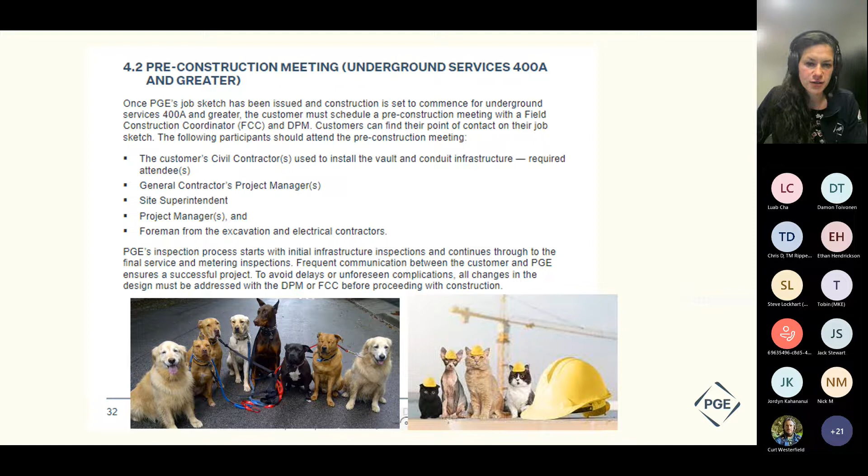Thank you. I'm going to jump forward here. Sorry for going backward. We're almost at the very end before the Q&A portion. Just wanted to remind, a lot of you have seen barrier posts, but we do require them in various situations where we feel it's necessary to ensure the safety of our equipment and the safety of the drivers around our equipment.

Often we try to proactively tell you, yes, we expect we're going to need a barrier post at this site, but we have noticed a lot of times that we don't fully get all the details we'd like to get, or things change. And so it is not uncommon for those to be later identified during that pre-construction phase, like, yes, now that we see this whole thing, we will need those barrier posts. So the goal is early identification, but there are times we can't do so.